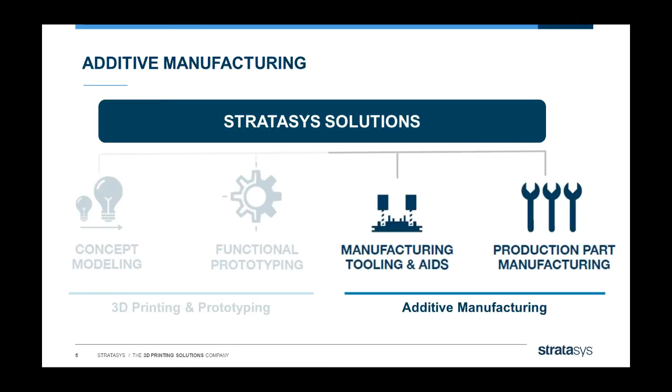Now let's have a quick look at how Stratasys defines both. Let's look at the manufacturing tools and aids. Here we talk about jigs and fixtures and manufacturing aids in order to hold pieces, store them or transport them. We talk about end-of-arm tools, which is everything attached to the arm of a robot. And I will talk about a very specific application, which is the production of injection molds in plastic.

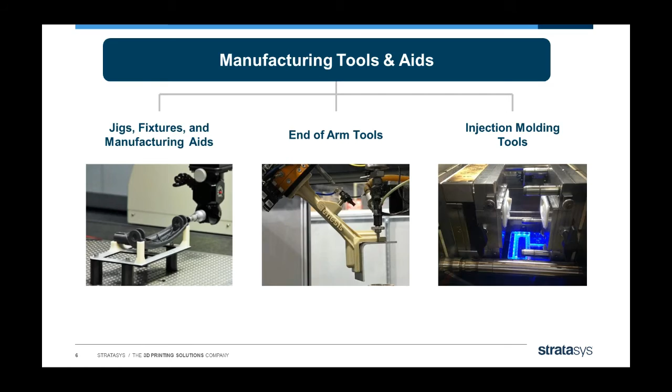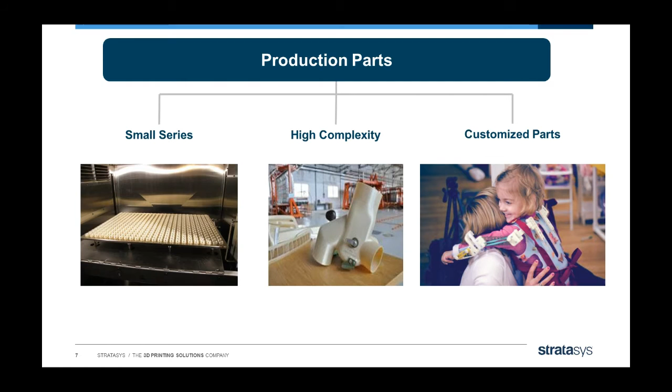The other part, the right side of additive manufacturing, is to produce the real parts, which are then used for something. Parts which are produced in small series or have a very high complexity, which is very difficult to make otherwise, or mass customization, which is gaining more and more importance in the market.

With PolyJet technology, printing tiny droplets, you can print very fine feature details, and as with an inkjet printer, you get very high material versatility. Imagine you have different color cartridges on your inkjet printer. You can mix these colors and reproduce a large number of colors. We can do the same with materials, reproducing not only a large variety of colors, but also a large variety of material properties.

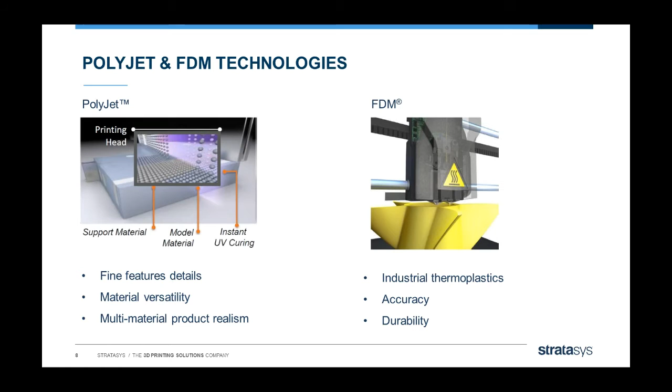On the right side, with FDM technology, we're using real industrial-grade thermoplastic materials, with the advantage of being known in the industry. They are the identical materials used for the washing machine, the car you're driving, and even the airplane you took for your last vacation.

So let's come to the applications. As mentioned, we're going to talk about three applications which are tools and devices for production, and the fourth application is the production parts. Let's look at jigs and fixtures. Jigs and fixtures are typically used to position, hold, or protect parts during the manufacturing process. Additive manufacturing for jigs and fixtures is used for quickly matching complex parts or reducing the need for paper drawings, really making the step to digital manufacturing. And of course, it makes it possible to create fixtures with very complex shapes.

Where does additive manufacturing fit jigs and fixtures manufacturing? It allows high complexity design of these jigs and fixtures. An important point is the reduced need to assemble these fixtures. Another best fit is if you are dealing with frequent changes. Another very important point is if you are dealing with different loads, temperatures and exposure to chemicals. This is where some technologies might fit the application better than others, especially the industrial production grade thermoplastics. A best fit of additively manufactured jigs and fixtures is if you have parts which are, well, I would say 1 meter is already quite a bit.

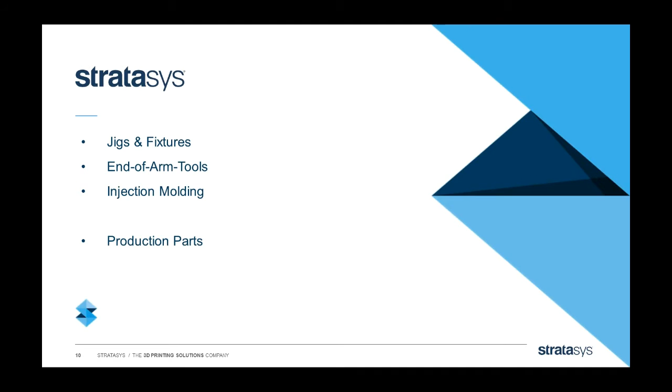I would probably say jigs and fixtures somewhere up to 600 millimeters, that's easily feasible. Up to 1 meter, it is absolutely feasible, although I don't know if it always makes sense. And then, of course, watch out for the tolerances, that we can produce parts with a tolerance of plus minus more or less like 1/10 of a millimeter.

Now, what are the benefits in producing jigs and fixtures with additive manufacturing? It is mainly to improve the efficiency, but especially also to improve the ergonomical aspects of my jigs and fixtures.

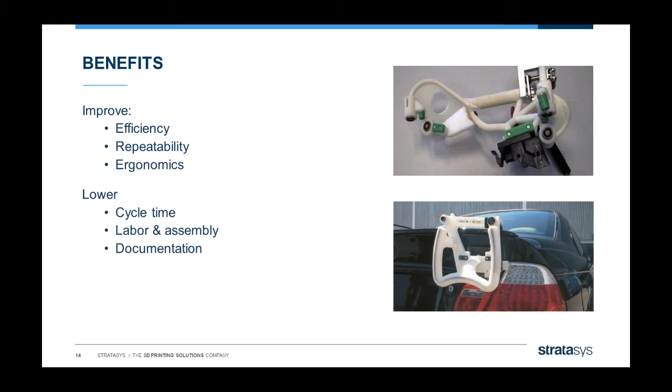So the end-of-arm tools are basically used to hold, move, and transport products. Additive manufacturing is good for increasing the throughput, increasing the speed, increasing the flexibility. It's basically the response if I have a product change and I need to change all my manufacturing and my workflow and my devices. It is relatively easy to reprint an end-of-arm tool.

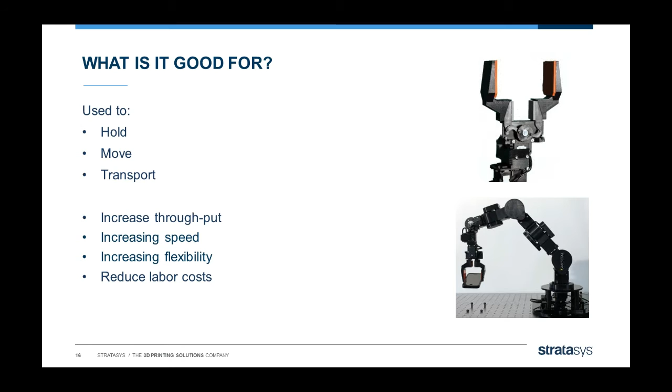Something which is missing here is actually the possibility to make lightweight components, which I think we're going to see on the following slide. So the best fits are all the cases where I need high complexity equipment, where I might actually need organic shapes in order to reduce the weight. In automation and robotics, I have to reduce somehow the weight in order to increase the payload I can transport. So weight reduction in robotics is relatively frequent, and it's a high demand currently.

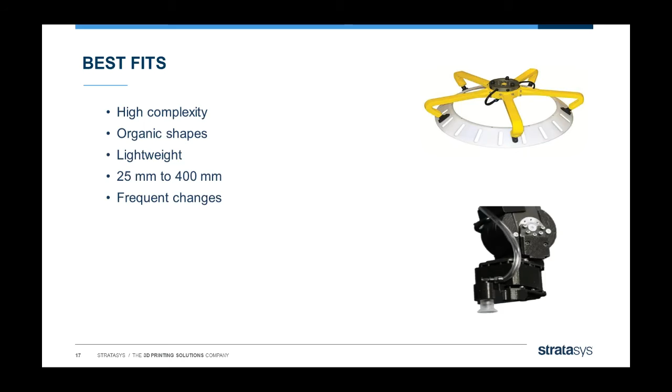And something I've already mentioned before is the flexibility and the fast reaction to product changes. The benefits of using additive manufacturing for end-of-arm tools is the reduction of design constraints. Since I am manufacturing the parts in layers, I can pretty much print whatever I want, whatever geometry I want. No matter how complex the parts are, I can print it. I can optimize my parts for functionality, meaning I can adapt the geometry of my gripper to the geometry of my product.

Here we see an example of a robot gripper which is using vacuum to hold a piece of metal while it is processed. First it's water jet cutting, and then it's smoothing the corners.

So this is a very simple example, but now imagine the toy industry and the robot gripper you need to pick up the Mickey Mouse. This robot gripper might probably be very, very complex because there is no way to grip that Mickey Mouse figurine. In this specific case, robot grippers which are following the shape of the product they have to pick up might come in very suitable. Of course, printing a robot gripper might be significantly less expensive than milling such a robot gripper out of aluminum.

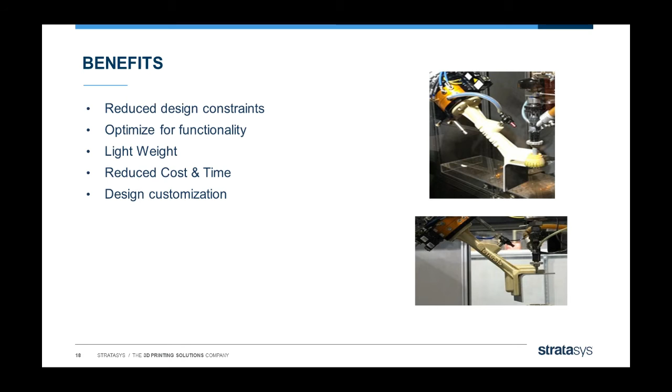Let's step to the next application, which is injection molding. If I say injection molding, it is basically printing the injection mold out of plastic. In this specific case, other than in the previous examples, this mold is printed with photopolymer. Here we are manufacturing, instead of the product itself, the cavity where we can then inject the final material, which is used for production later. This is really used for design verification and especially mechanical testing of the final product, like lifetime testing or testing of resistance in different environments.

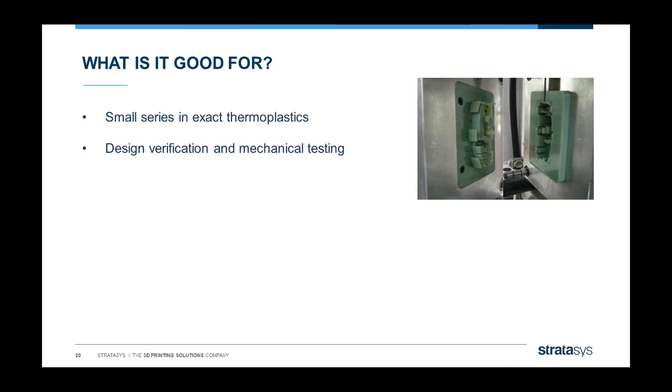So what is it good for, really? If we quickly look at the workflow or design cycle of an injection molding part, we see on the very left that we start with a CAD system, the part is designed, then probably somebody has the idea to produce a prototype, typically for concept or simulation. So basically we talk about a rapid prototype. But then at a certain point I need a second prototype in order to test the function with the real material and with the full range of tests I can make.

So I need the original material first, and this is something which is very often very hard to simulate. Sometimes it's feasible, but on the other hand, I also need a verification of my final production process. So if I make a real prototype for testing, I need not only the real material, but also the real manufacturing method. And this is where the printed molds come into the game.

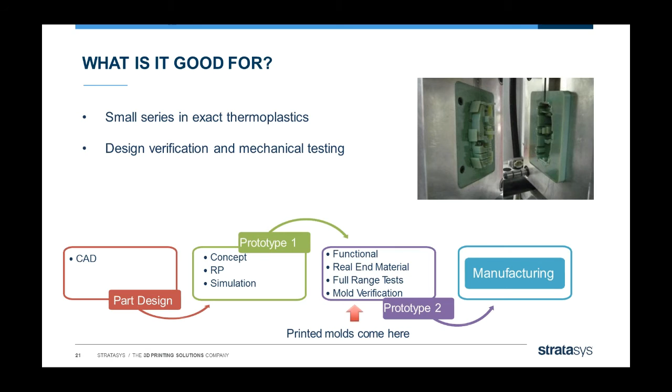So the best fit for these molds is for thermoplastic materials with moderate temperatures. What is a moderate temperature? Something around 250 degrees centigrade. Moderate pressures - well, I don't even have a rough number for you because this pretty much depends on the geometry of the part and the geometry of the mold. I think it's relatively obvious that I should have a material with good flowability, and of course use standard industrial plastics with these plastic or photopolymer molds, using relatively moderate clamping forces - somewhere between 50 and 100, probably even 150 tons.

You can certainly imagine that the quantities of parts you can inject in a photopolymer mold might be reduced. So here we're talking about 5 to 100 parts, although I'd like to point your attention to the graph on the right side, where on the front you see molds manufactured with photopolymer by the PolyJet technology, and on the left side the number of shots you can make in such molds. On the bottom you see 4 classes of materials. If we use polypropylene, for example, you can actually easily exceed 100 shots, even 1,000 shots - it's a really easy material. But if we go to the extreme of polyphenylene sulfide or even PEEK, the number of shots is significantly limited, and it might actually get down to zero. So the quantity of parts you can inject in such a photopolymer mold really depends on the material, but also on geometries, draft angles, and the depth of the cavities, for example.

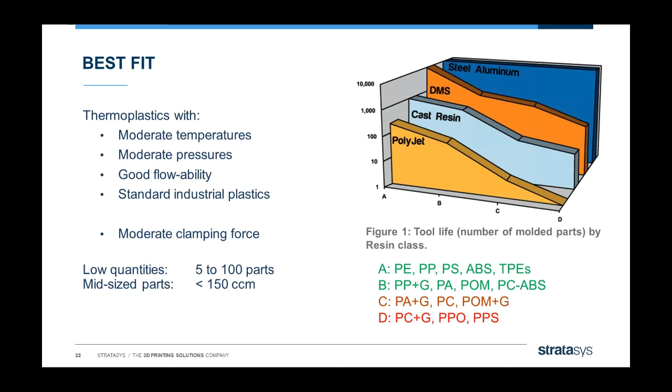Let's have a quick look at the benefits of injection molds. Of course, it's to reduce lead time, reduce cost, but also increase speed and reduce the time you need to verify everything, because all of a sudden you might have mold making in-house, which otherwise you would have to outsource. So having the possibility to make design iterations in-house becomes more and more an issue and an important argument.

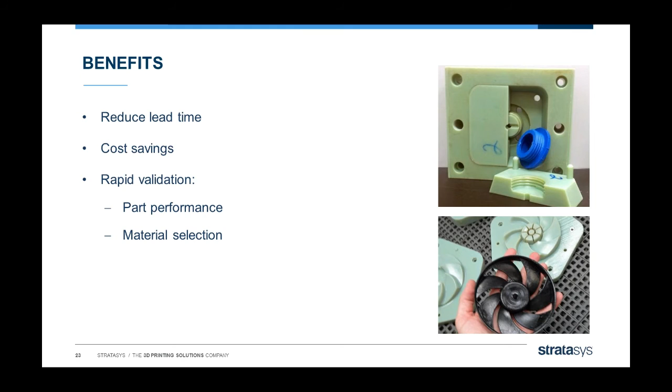So far about the manufacturing aids and tools and devices. Last but not least, let's talk about the production parts. And here we talk really about additive manufacturing for the final product.

So what is it good for? Where is it used? It's mainly used in pilot production before you actually start the production and you do some alpha or beta testing. Or it's used also while you're waiting for the tools and devices for the final production. But sometimes it's even used for full-scale manufacturing.

And here it really depends on how many parts you need. What is that final production? It's certainly not talking about millions of parts. But if we talk about a series, which might be 1,000, 2,000, 5,000 parts, additive manufacturing might start being a serious, significant option. Then, of course, we're talking about the end-of-life production when the tools are no longer available, or repairing of tools might not make sense anymore because the product life is ended anyway.

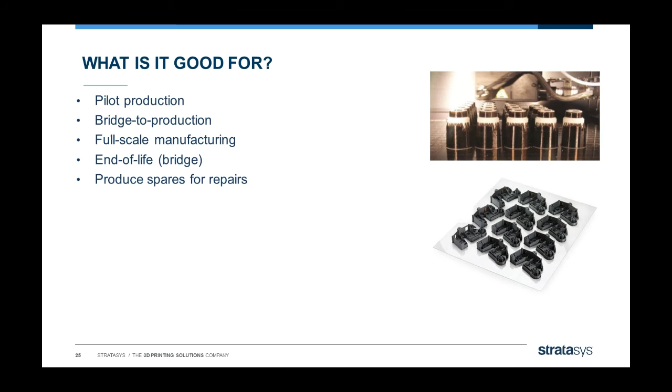And last but not least, it's really to produce spare parts for repairs, for example. If you have a decentralized maintenance facility, then instead of having local spare parts inventories, you might start considering having a local additive manufacturing device which can produce spare parts on demand. No, I am not talking about the wing of an airplane. Yes, I'm certainly talking about the closing latch of a fridge. So it really depends on what these parts are.

The best fit for production parts manufactured with additive manufacturing is, and here I slightly disagree with the slide, it is not 1 to 1,000. I have seen people making 5,000 parts and more over the years. So it really depends on the cost of inventory, for example. Now, mass customization is something I've already mentioned, and here the number of parts can increase significantly, and we can easily talk about 10,000. If they're all different, well, then it starts really making sense.

Frequent revisions of parts, if you have frequent changes with a very short product lifetime, like in aerospace, well, that's another area where additive manufacturing starts being used, but not only in airplanes. Imagine ambulances with different legal requirements. Well, there are many and frequent changes there as well. That's another example where additive manufacturing is used for production. Then, of course, finally, the complex design, which I've already mentioned before.

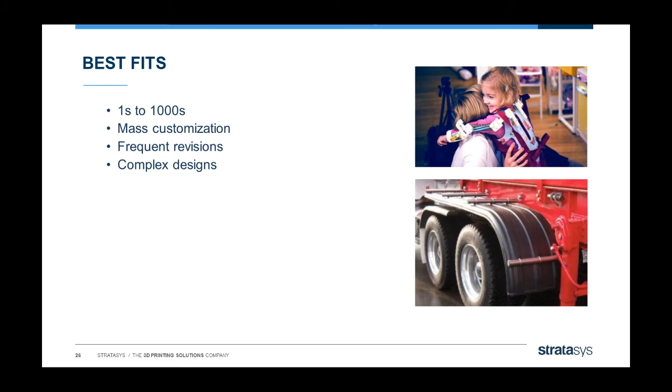The benefits of additive manufacturing in production are, again, the lead time, just-in-time, digital inventory. Well, the digital inventory is something which starts being more and more important, especially if we start considering the databases of products on the internet, where you don't really have inventory of physical parts anymore, but you might have libraries of geometries you can download, and then you can manufacture somehow automated.

The optimization for performance, this is basically something which could pretty much fill an entire webinar, because here we talk about not only topological optimization of geometries, but also about internal structure of lightweight parts. Since we are not limited in the geometry, we can pretty much print everything.

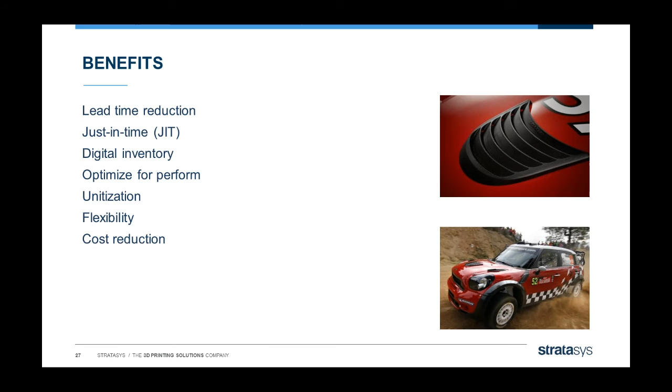Then, of course, cost reduction and flexibility in the typical aspects are included as well.

And last but not least, let me just quickly give you an outlook of advanced manufacturing. That's something I've already mentioned in the previous slide. It is really changing the way we think about manufacturing, changing the possibilities we have in manufacturing, and this is something which starts coming up in the industry right now, where people realize the freedom they have in using additive manufacturing technologies for their products.

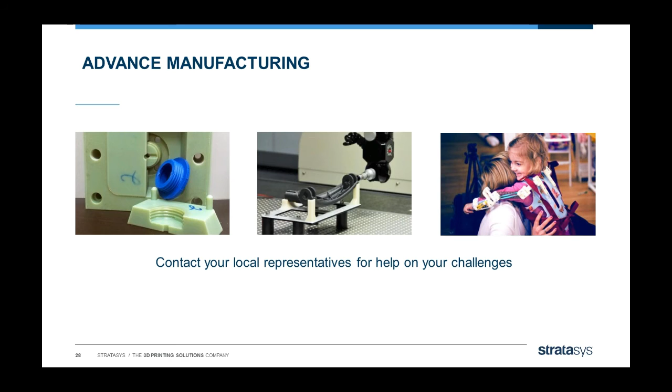And this is basically all I have to say about the subject, so I'd like to thank you for listening, and if there are any questions, please feel free. Thank you.

Thanks, Frank. That was really insightful, actually. Great look at 3D printing and additive manufacturing, and a lot of those I'd never really thought about the applications that you've got there as well. Particularly looking at the end of arm tools. It's, well, for me anyway, it's a completely different way of thinking about it.